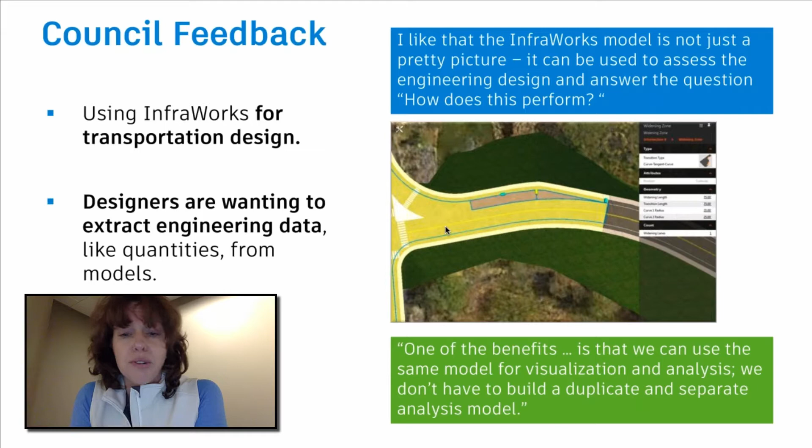This is something they've seen increasing in frequency over the last year. They want to use InfraWorks for visualization, but they also know it needs to be more than just a pretty picture. They want to be able to do engineering design, whether that's analysis or geometric design, and they're starting to use it for that purpose on some projects.

I think the polls confirmed this. I took a quick look at the gallery this morning before the webcast to see what was there, and the breakdown of projects on the gallery aligned with what we saw in the polls. Quite a few people are using InfraWorks for transportation projects like bridge replacement proposals or visualizing an interchange, which you see in the lower right corner. There's also quite a few site design projects in here, like new office buildings and new universities and schools.

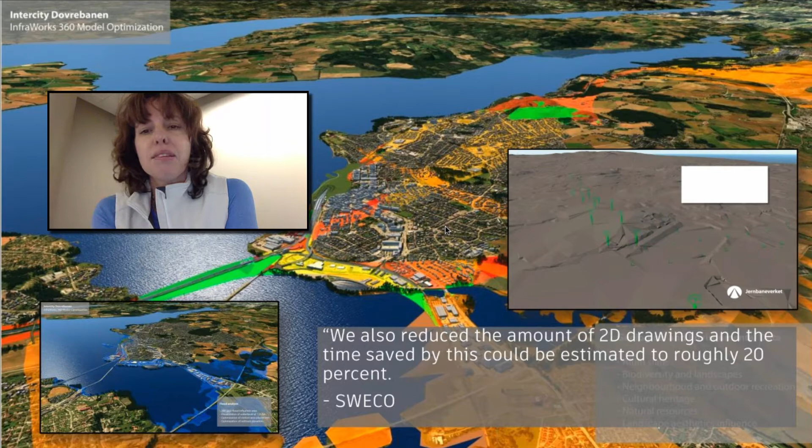I wanted to point out this project in particular. This is a corridor planning project in Norway. You might recognize it if you were lucky enough to be at AU. This was the winner of the Infrastructure Excellence Awards, the 2016 winner. I point this one out not because anyone's done any detailed transportation engineering design yet for it, but this project was really about planning a corridor, transportation planning, and visualization of some data. We've seen a lot of projects like this, particularly coming out of the Nordics, Sweden, Norway, Finland, as well as other parts of the world.

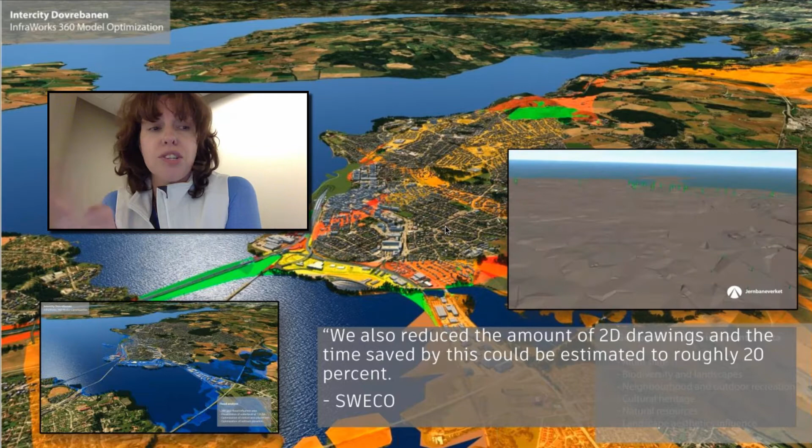We've heard a lot over the last year about how InfraWorks is being used for these large-scale planning projects. Now what we're seeing are those same companies coming back to us, asking how they can use InfraWorks for more of the preliminary design now that the planning phase is done. So one of the things we're looking forward to doing over the next year is seeing how we can exercise some of the design and modeling capabilities in InfraWorks to support the design of these projects well past the planning phase.

I also wanted to show this one because it's pretty impressive looking. It's a good visualization too.

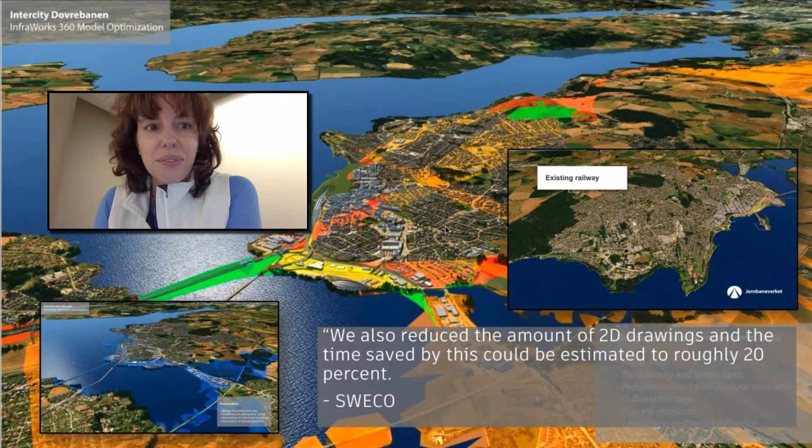So let's get into the new release. It's a little bit about what customers are doing with InfraWorks. We're seeing it used more and more to make engineering design decisions, and you'll see that trend reflected in a lot of the things that have been released this past month. We wanted to support a lot of the workflows related to engineering design.

I always like to show a release timeline so you can see where we were this time last year compared to this year. We had 3 releases in 2017, and the last one was about this time last year. We were talking a lot about road and highway design, mobility simulation, tools for modeling interchanges, and roundabouts.

This year, we're still talking about roadway design for sure, but we're also talking about bridge design, and that might be one of the key highlights of this particular release. In addition to bridge design, we've also done a lot to build more data into the road models you can create in InfraWorks, so you can get more information out of the model, like road material quantities and notifications when the road geometry violates a design rule. We've also done a couple of other things that I'll go through shortly.

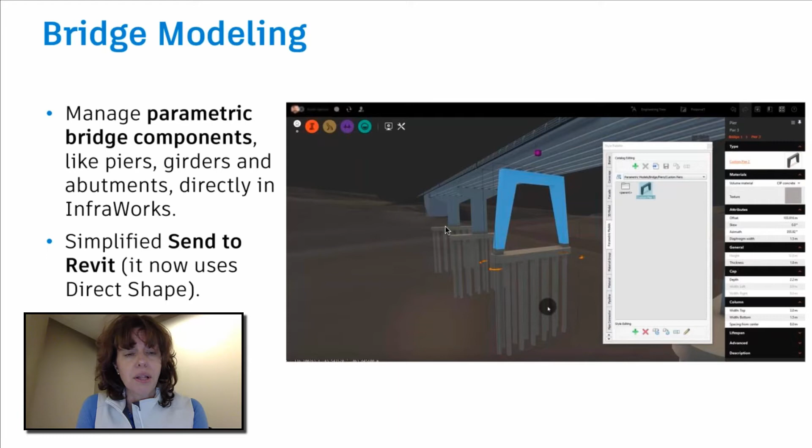So I'm going to start with bridge modeling. For those familiar with Project Kameleon on Labs, that project eventually made its way into a couple of things, one being this feature. What it turned into is the ability to model parametric bridge components like a pier, as shown in this example, directly in InfraWorks. I have a video the team put together showing how it works.

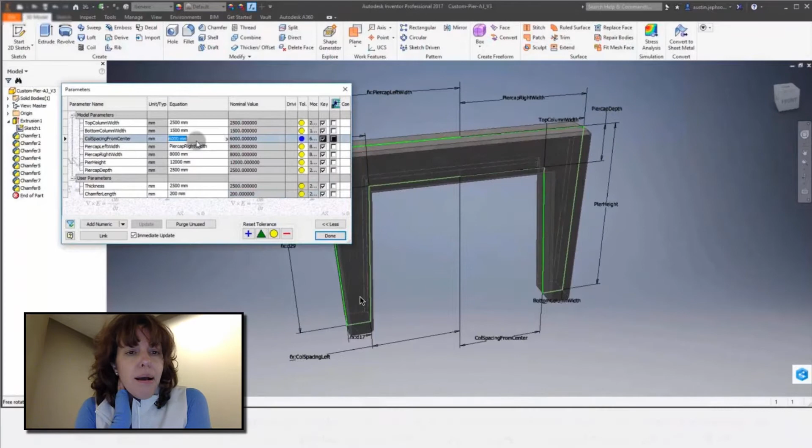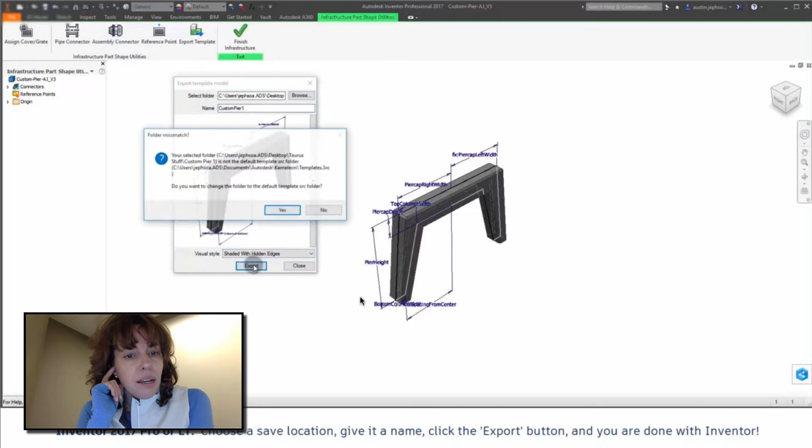The first step is creating a custom part using Inventor. You can use Inventor Professional or Inventor LT for this, and build any part you want with any kind of parametric relationships you want. There's really no special rules or restrictions here—you can build a pier, a girder, or an abutment. In this case we're looking at a pier. When you have it the way you want, you can export that template to a file that will come into InfraWorks so you can use it to model a custom pier. This is definitely different than, say, Part Builder, if you're familiar with using that for drainage components in Civil 3D.

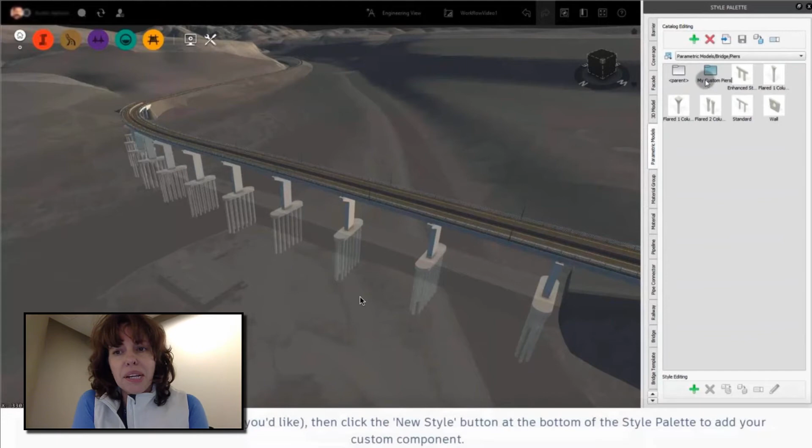This part of the process shows how you get that pier into InfraWorks. So much like any other piece of content, whether it's a style or a 3D model, you can bring it in and import it into InfraWorks through the style palette. You can organize those things however you like. We're creating a new folder and going to bring in that pier. It's a custom pier, that was the name of it.

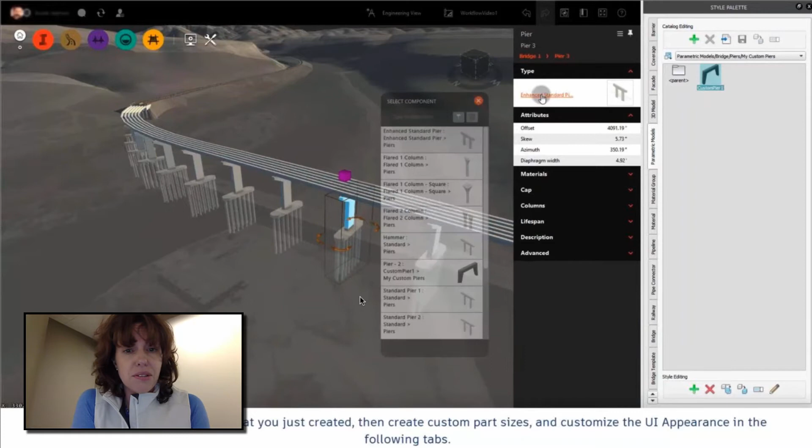You get a 3D preview of that pier in the window, and then you can apply it to the model. In this case, they're going to select one of the piers that's already on that existing bridge, and show you how they replace the selected pier with the one they created in Inventor and brought into InfraWorks.

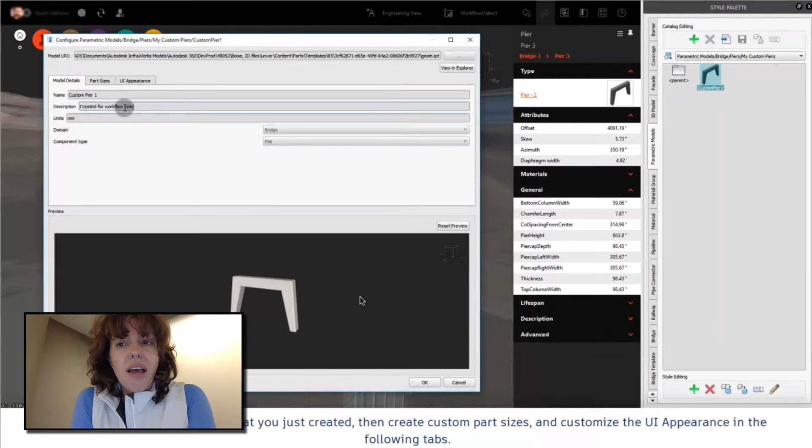The workflow doesn't stop there. So you have your custom pier, and now you can do a couple of other things. You can edit the dimensions of that pier through the stack if you wanted to. You could go ahead and create a copy of that pier, change the dimensions, and save it, so you have different modifications of that initial piece of content available in your InfraWorks model.

In this case, they're going to create a second custom pier that's the same shape as the first one, but they're going to change some of the dimensions, I think, to make it a little bit narrower and to make the legs of the pier a little bit more vertical. And you can save this.

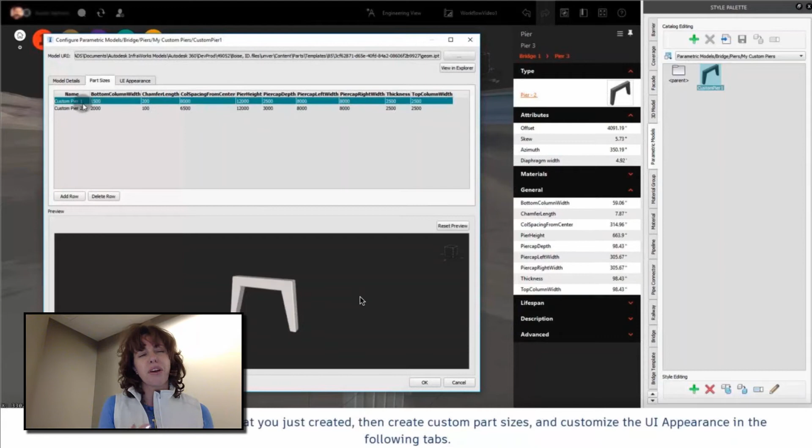It's kind of like the idea of having different parts in Civil 3D, where you can have the same part but just variations on that part by changing a couple of dimensions. The difference here is that they're available in InfraWorks, and that's where they show up on the style palette.

The other thing you can do is change how the parameters are displayed in InfraWorks. So you have a lot of control over this—right now what they're doing is changing the way the parameters are grouped and displayed in the stack. The stack is the vertical panel you see on the right for that selected pier. They're going to change a couple of group names so they can put groups of parameters together, probably to make it easier to navigate or make the changes you want.

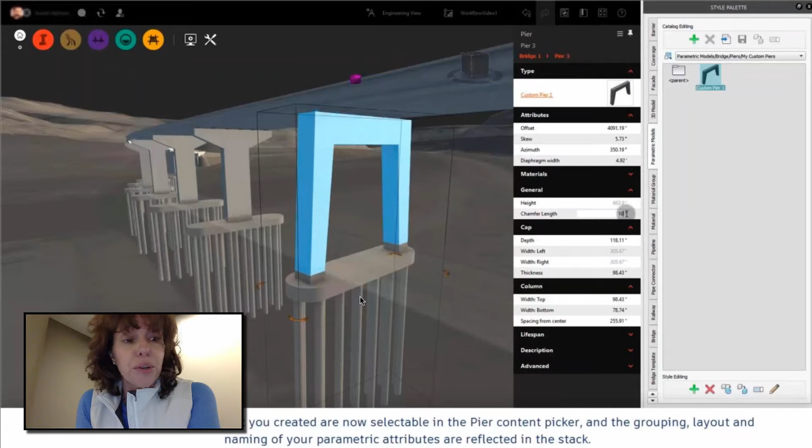You can customize the tooltips. So if you have a parameter, say height, and you want to explain exactly what that height is, you can use a tooltip to do that, and customize it to be whatever you want. This case runs through the grouping and customization pretty quickly, but there's really no restrictions on how you group, label, or describe things through tooltips.

This is showing a workflow that was released in the past release, which is applying to the next selection. So you can apply that one edit you made to all of the other piers.

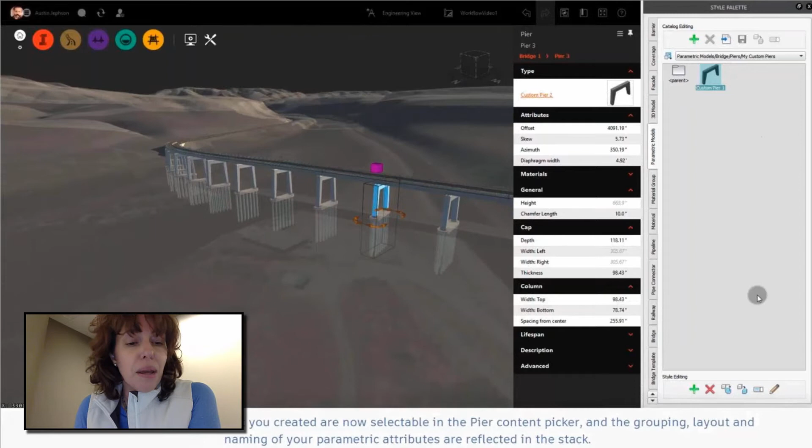And then you can export those things. If you want to use them in another InfraWorks model for another project, you can export them to a separate file, and go through those steps again—import it into a new model, modify it if you want to, and reuse it for the design.

Eric, I'll stop here and see if there are any specific questions about the bridge design capability before I keep going.

I'm scanning the questions now, Sarah.

It says, can I use Revit to create parametric InfraWorks components? That's a really good question. You can send the bridge model to Revit where you can continue the design, add rebar, and do the documentation. No, not at this point for creating the parts, though.

There's actually one question that I can answer. Somebody asked if a video showing this custom bridge component capability is available somewhere, and yes it is. If you visit the YouTube channel for InfraWorks, you'll find that video up there, so you can check that one out, and there are other individual videos about the different features as well.

Yeah, and I know the team that worked on this functionality has created a number of other videos that they'll use as the basis for help at some point. Not sure what the roadmap is for releasing it, but they do know that having videos showing that whole workflow and the potential of what you can create is important, so they're working on that too.

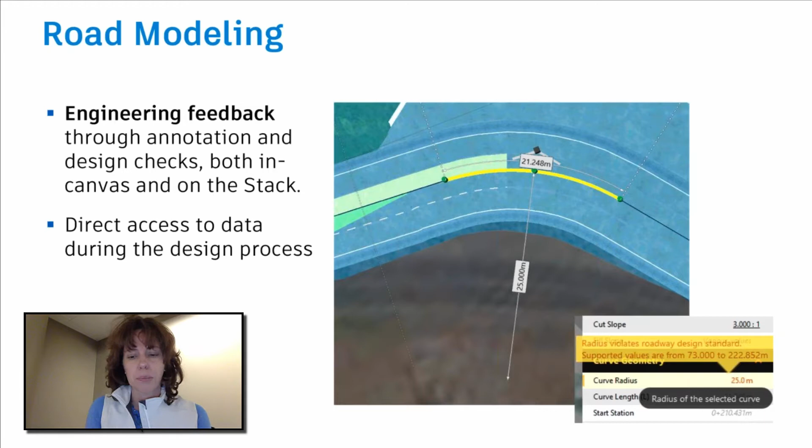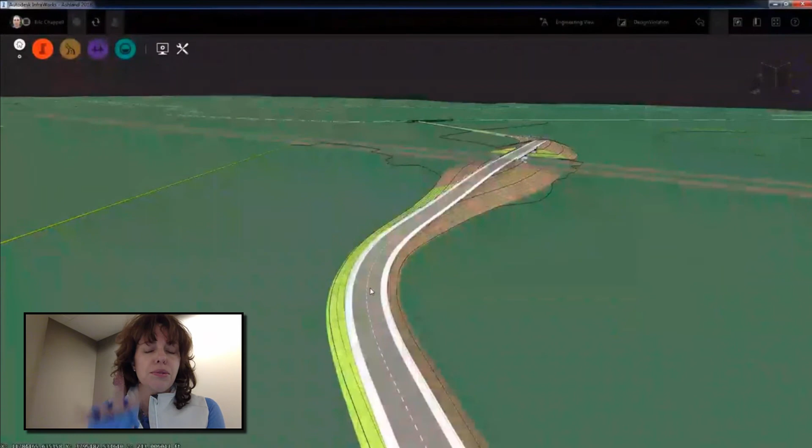This is a quick video that shows what it looks like. I think Eric will recognize this one. This is a roadway in InfraWorks that's selected. One of the things you'll see are station labels on the selected roadway, shown at key geometry points and at 50-meter or 50-foot increments. Those station labels adjust depending on how you're looking at the model, depending on your perspective.

What's happening here is we're editing the radius of the curve in the middle of the screen and making it too small. When we make it too small, it turns yellow - it's a warning. You also see information in the stack that tells you the radius is too small, and it gives you suggestions on how to change that, basically make the radius bigger. When the radius conforms to the standards, it changes from yellow to green to let you know it's okay. We're working on incorporating more feedback like this so you get real-time feedback while you're designing.

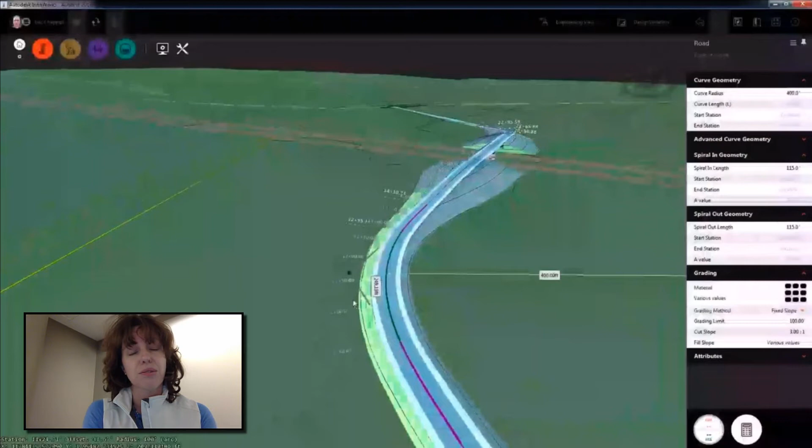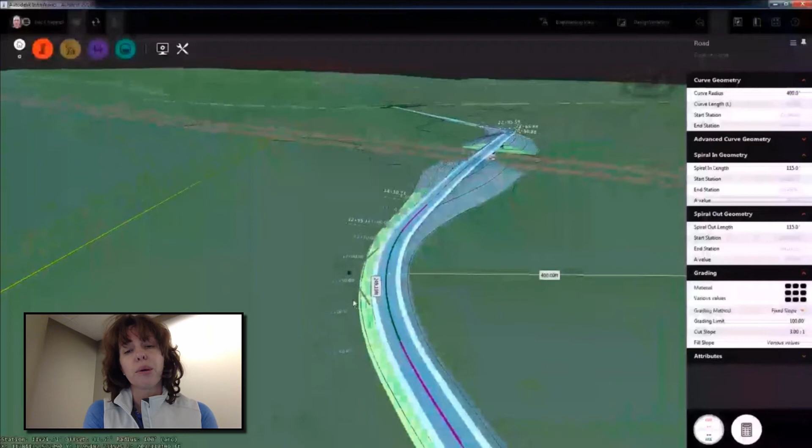This is a relatively simple example, but you can imagine this kind of thing applying to other pieces of the design. Like if we had a more complicated spiral here, it could give you feedback about that. We can incorporate some of these things into bridge design, which we'll talk about a little bit later.

The third thing I'm going to talk about, which is also very important to roadway design, particularly in terms of getting engineering feedback out of the model, are material quantities. Throughout the course of 2016, we focused on extracting earthwork quantities out of the model and reporting those quantities to the user so they can make design decisions.

We've extended that, and now there are more quantities available on that panel. In this case, you're seeing road materials of the components used, like the amount of pavement needed to construct the particular roadway you've laid out. We've also created the ability for InfraWorks to understand the 3D models alongside your roadway design - things like lights, guardrails, things InfraWorks might consider road decoration.

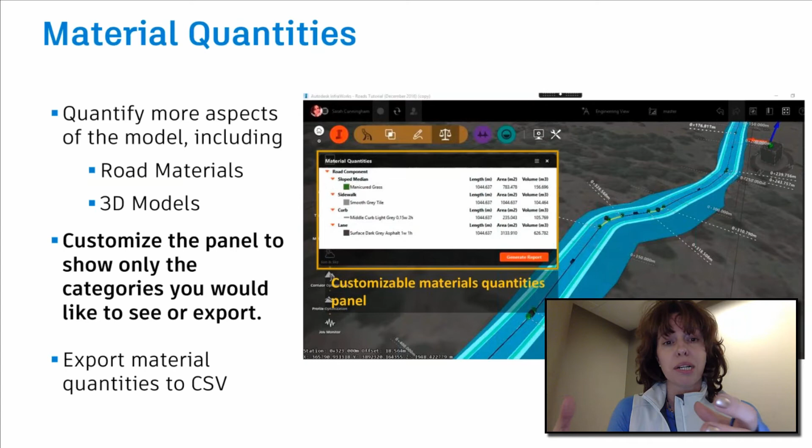Those are now on the quantities panel as well. Now this is great because it gives you the ability to see lots of things about your roadway design. The flip side is that you're going to see lots of things about your roadway design, so potentially this list of quantities could be really long. So the second thing the team worked on was the ability to customize this panel so you can see quantities for only the things you want, so the panel doesn't become incredibly long.

This is the same roadway we were looking at just a minute ago. But now we're going to look at the quantities for that road. That selected road has a bridge, it has some components like a lane and a shoulder, it's got a jersey barrier at some point that it's accounting for. And there are some other 3D models like street lamps - I think it counts 4 street lamps.

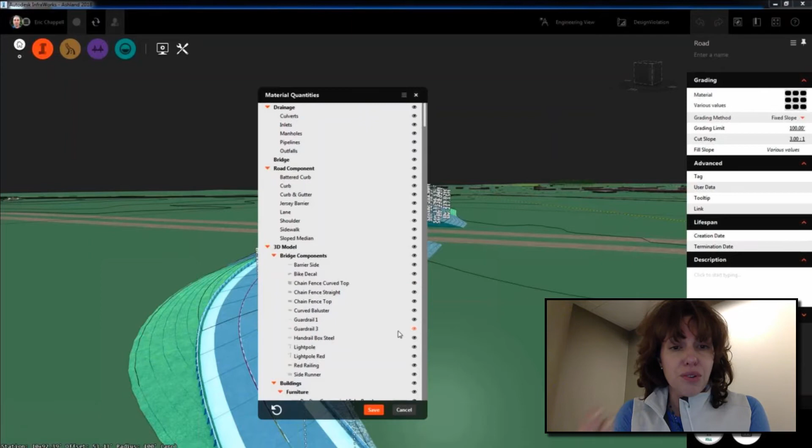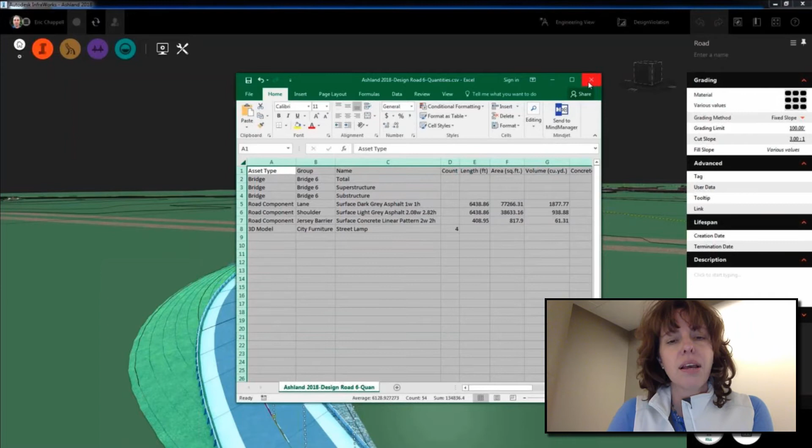That's a really limited list, but if you wanted to see the full range of things you might be able to see, like the drainage components, all the things that go along with the roadway model, like additional components, you can turn on and off the things you want to see, so you can have a quantities report that reflects exactly what you want. Like maybe you just want to see the drainage stuff and nothing else, or just the bridge stuff and nothing else. And you can export that configured, curated quantities display to a report, which in this case is a CSV file shown in Excel.

And the last couple things I'm going to talk about relate to visualization or usability enhancements. The first one is usability enhancements. This one seems small, but it's an important one to address.

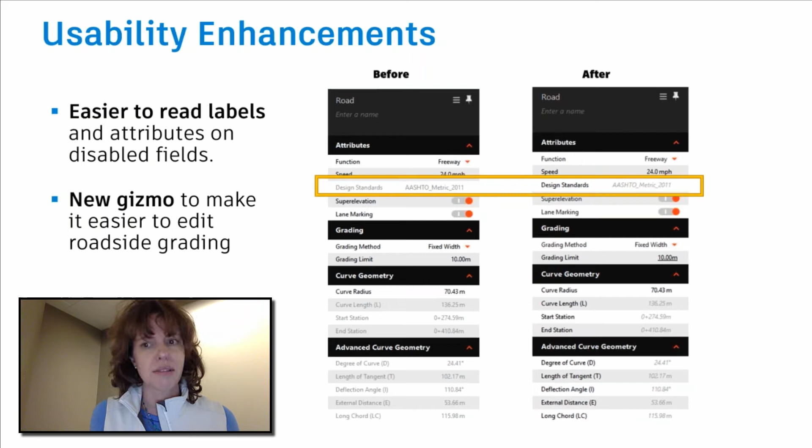We made some of the labels easier to read on disabled fields. I used a screenshot to show this since it's the clearest way. When a field was disabled or not editable, before on the left it would be a light gray color, which is hard to read and hard to pick out. So we made the label a little bolder and changed the details about it. We made them italicized to make them stand out more.

The other usability enhancement relates to roadside grading. We made improvements to roadside grading in the January release, 2017.3, that allowed you to create grading zones, so you could specify specific criteria for a station-to-station limit on one side of the road or another, as shown here.

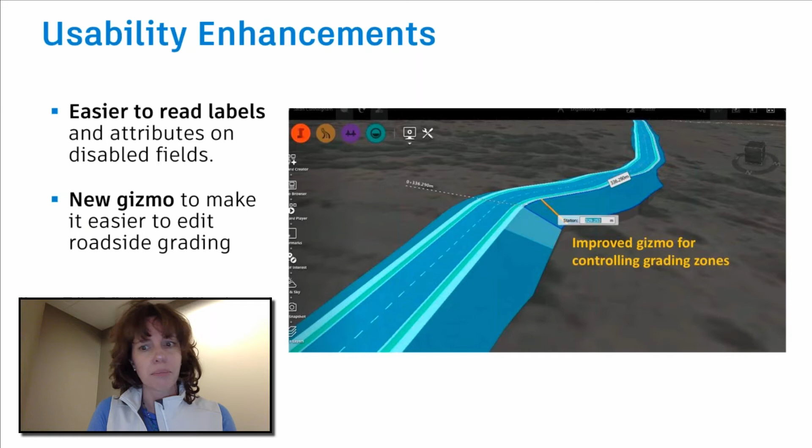We changed the grip to make it a lot easier to control and manipulate, so it's easier to pick the limit of one grading area versus another and change it around. The grip used to be a lot smaller and harder to find before, so we improved that too.

This last thing might be most important to those of you using InfraWorks for visualization. If you go to the view settings, which is a relatively new panel, I think we released that in the January release, but it might have been back in September, I'd have to check.

One of the things we hear from customers who do a lot of visualization, particularly of large areas of trees—a stand of trees, a forest, any model with a lot of trees—is that up until now you can run into problems where it performs poorly while panning and zooming, and might not render all the trees quite right. The reason is that trees, out of all the assets in InfraWorks, are the most complicated to render well. They're just complex looking in general.

So if you have a model with a lot of trees and configure a view to use these simplified trees, you might find the performance is a little better. It becomes easier to work with in cases where you're not so concerned about having a realistic view of what the trees look like in the model.

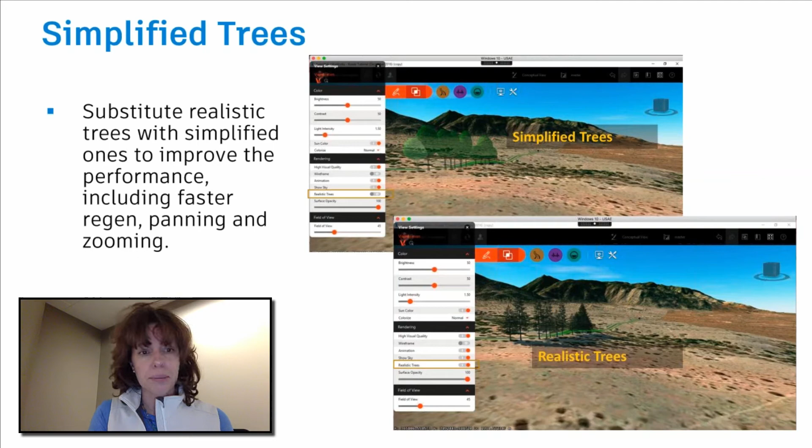So those are the highlights of the release that was just launched a couple of weeks ago. There's only been about two or three months between releases, so we're on this path of releasing more frequently throughout the year. The good news is it makes these presentations a little easier and shorter to follow. But I want to leave you with what we're working on next.

We publish the InfraWorks roadmap on the forums, and I realized the one we published back in January was really hard to read—that image at the bottom somehow gets simplified when I post it, so most people couldn't read a lot of the items. We're going to fix that before we post the next one for sure, but I'm using this opportunity to let this group know what will be on that roadmap when we post it.

I thought giving this audience on the webcast a sneak peek at the roadmap might be a good idea, so that's what I'm going to do. At some point in the next couple of weeks, I'll publish this to the forums for everyone to see. As Eric said at the beginning, when we talk about the roadmap, there's no promise this functionality will be delivered at any point in time. It's just things we're working on next, and we want you to know what those are.

In terms of modeling, whether bridge or road modeling, we're focused on a couple of things. One is in-canvas editing. Before, in one of the videos, I showed the station labels on the road and how it changed color and gave notifications when it was out of whack. We want to create more ways to edit that information in Canvas, as opposed to always editing on the stack. If you think back to the bridge video I showed, a lot of the edits we made to the pier, once brought into the InfraWorks model to view in real-world context, were made on the stack. We want to enable that editing to be in Canvas whenever possible too, because both mechanisms are important to designers and useful in certain cases. So we're working on that.

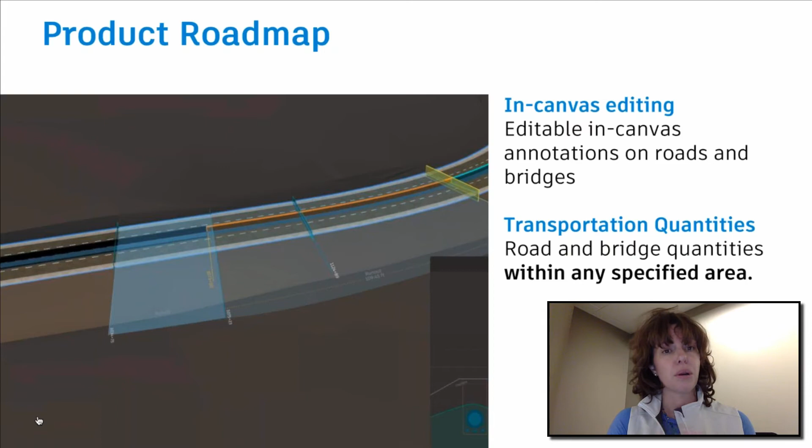The second thing we're working on relates to quantities. I just showed the material quantities added to the quantities panel. One of the things we're working on next is letting you define an area and see only the quantities within that particular area. It doesn't have to be all the quantities for a selected road or group of roads—you can specify any area you want and just see the quantities within that zone.

Continuing with things we're working on related to modeling, we're working on geometric layout that will allow you to design on and off ramps a lot more easily. Sometimes we call this element-based layout.

We're also working on adding more parametric assets to the model. I showed the ability to bring in a pier created with Inventor. We'd like to extend that capability so you can create anything in Inventor—maybe a street light, a guardrail, or some custom barrier—and bring it into InfraWorks with all those dimensions and parametric relationships, doing a workflow similar to the pier. You could bring it in, create variations by changing the size, modify the UI, and modify the tooltips that appear for basically anything, not just bridge components.

The third thing—maybe the most important and significant for last in this roadmap update—is what we're hearing from many customers worldwide: drones and scanning are becoming a much more realistic part of their workflows. Maybe five years ago it was something only the biggest or most specialized firms did, but not an everyday thing. Now scanning is becoming more of an everyday tool, and a lot of our civil infrastructure customers have scanning data they want to incorporate into their civil engineering projects. So we have some really exciting work related to point clouds in InfraWorks as well as Civil 3D.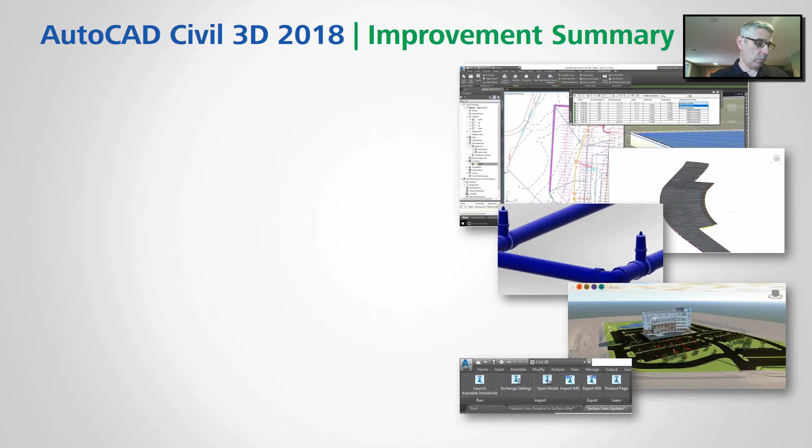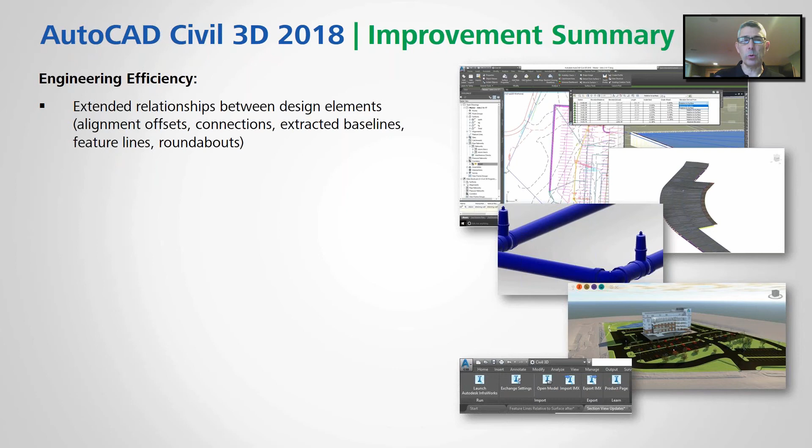I would categorize the improvements in three areas. One of them is related to engineering efficiency. There was actually a question about how we don't have all the relationships in place across Civil 3D, and that's true—there are still some places we want to fill in, but that was the driving theme for this release and the last: to extend relationships between more objects, giving you more capability and power. So it's alignment offsets, alignments connected between two different alignments, how we can use an extracted baseline and a corridor—really tying those all together more tightly, and giving you additional control as you're modeling. We'll talk about some of those improvements.

And then focusing on improving the modeling of drainage and pressure pipes—some of these are improvements we made during the 2017 release that we've now been able to roll up into the 2018 release. We also know that you guys have to deliver production drafting, so we've made improvements on things that have actually been in the product for a long time, but you can now create plan-over-plan and profile-over-profile sheets.

There are also significant improvements on your ability to react to changes when generating section sheets, so we'll look at that. And then finally, this was a theme throughout many of the questions on the webcast: it's really about interoperability between products. How do we improve the workflow between Civil 3D and InfraWorks, between Civil 3D and 3ds Max and BIM 360, and work being done between Civil 3D and Revit, InfraWorks and Revit, and so on. It's certainly a theme throughout Autodesk. We know we have to do a better job of making these products work in a more interactive and collaborative way.

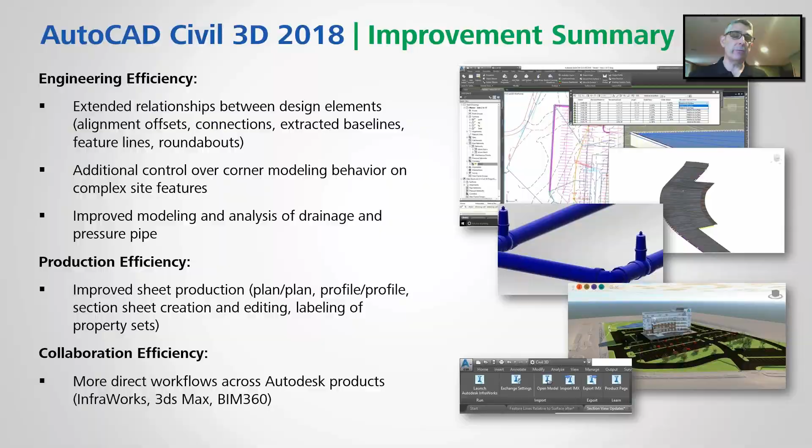Okay, I'm going to go through these quickly, but at a high level, here are the key things you're going to want to look for. First is this whole idea of having a feature line that's relative to a surface.

Think of it this way: if you go to an Autodesk University class, you'll first see somebody create a reference surface, then project feature lines up to that surface, and progressively refine those feature lines to build their final top surface. What we've done is made it so those feature line elevations can remain persistent to that surface. So if that surface changes, if you want to make a macro-level change, you can do so, and all those feature lines will react.

However, we also know there may be a lock to an elevation, or feature lines that we want above or below that surface as you get into that refinement process. So that's a major change here, targeting all users - land development, site, and transportation folks are all going to benefit from that capability.

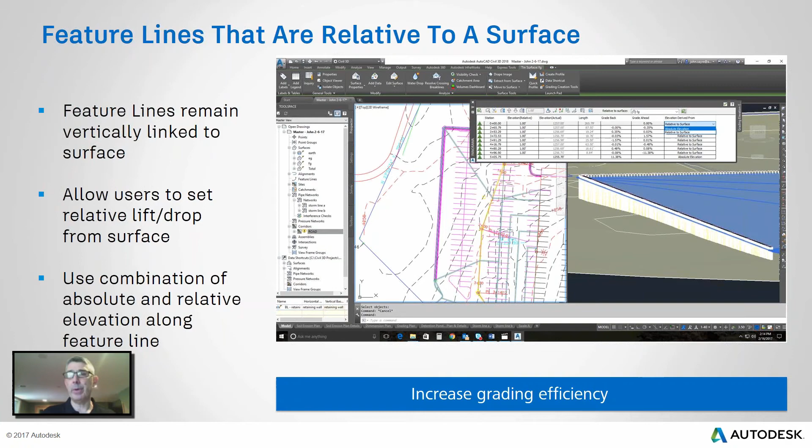Another one along the line of extending those relationships: we've always had the ability to create offset alignments from a center line or from another alignment. What we've now added is not only do you have that offset horizontally, but you can now apply a vertical to it. So when you offset that alignment, you can say, I want to follow the design profile from that center line, and offset at say a 2% slope, and then change that slope at certain station values.

So if I want to design, say I'm working on a subdivision road, and want to design my edge of pavements relative to my centerline versus using a corridor, I can do that very efficiently, with a number of controls we've added. We've also done some simplification - simple things such as when you create the offset, automatically superimposing that onto my centerline profile. Really just trying to cut down the number of steps and picks and clicks for a pretty typical operation.

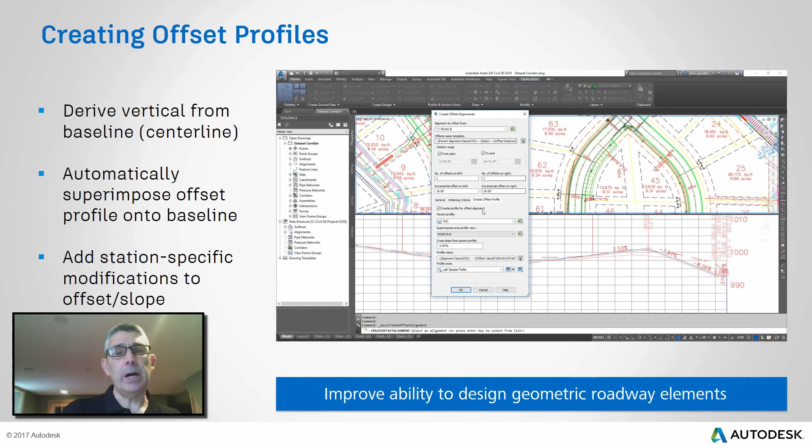So again, that's an example of connecting those different objects in a way that we haven't had in the past. Another one would be connecting two different horizontal alignments, both horizontally and vertically. Like in the image on the right, I've got my edge of pavement for my main road and that cul-de-sac road. What we can now do is add a simple connection spanning the two, in this case putting in the curb return. I have control over the radius, and control over how that vertical is going to be controlled, locking vertically to both alignments that it's connecting. So if one thing changes, the profile updates for that connection.

You can also overwrite vertically what's happening within that connection - say you want to change things for flow, for drainage, and so on. We've had the ability to do something similar when modeling an intersection. This gives you a bit more of an ad hoc approach, so really any types of alignments you want to join with a persistent connection, you can now do very, very easily.

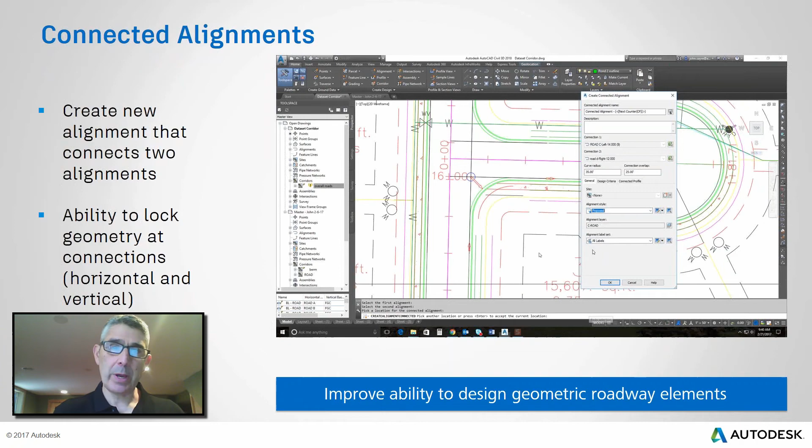Okay, and then the last one I'll talk about here is really being able to progressively build out a corridor using more and more of the individual strings.

Over the past year we added the ability to give you better control over extracting features from a corridor. So I want to specifically extract a string that's named this from station here to station there. We now have the ability for you to use that extracted feature line and define that to now be used as a baseline in that same corridor. It's this idea of progressively adding more and more controls into a corridor.

Rather than working with conditional assemblies and making a gazillion different regions in a corridor, you can make it into a very simple corridor, then extract a key string, add it as a baseline, and build off of that. This gives you control, maybe a different frequency control within one part of the corridor, or maybe driveway curb cuts, and you don't want to manage all of those as different regions. So a lot more control, and it's that whole theme of giving you more things that remain connected so you can progressively refine and build out more of your different types of models - transportation, site, land development, all of those different project types.

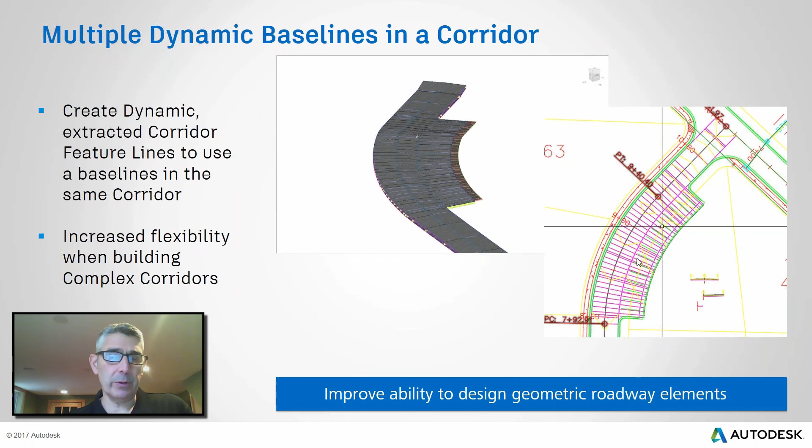Looking at production efficiency, what we've seen over the years is people initially create their section view groups, laying out all of their sections onto sheets just the way they want. There's generally a lot of hand drafting that has to occur - a call out, a bubble, maybe some text, maybe some block that you can insert into that specific section.

Then what happens is, okay, maybe we need to make a change - maybe we insert a section somewhere near the beginning of that sample line, near the beginning of that roadway. What people were challenged with is how do you update all of those sections and have all of that ad hoc drafting move with it? That's the introduction of this.

We call it a section view drafting buffer. Basically it's a non-plotting area - well, you can plot it if you want - around the section view, and anything within that, any CAD entity, hatching, blocks, text, whatever it may be, those are graphically glued into that section. So they're still their own thing, but if I insert that sample line and then update my section view group, all of that drafting is going to move with that section to its new location.

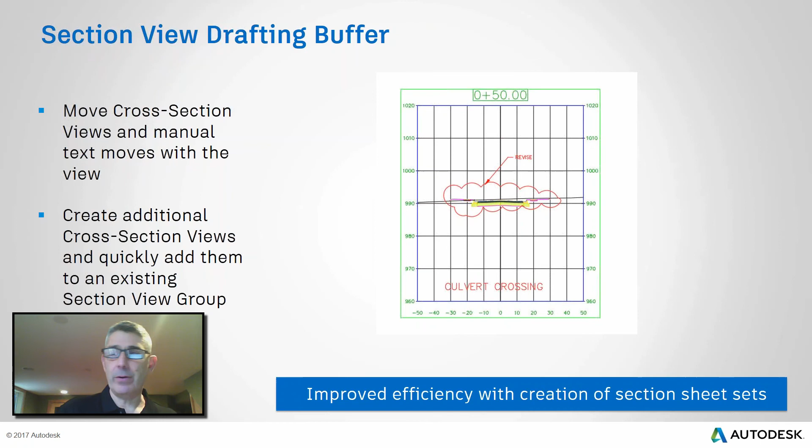So it gives you that ability to get the drafting the way you want it, and then if you have to make a change, you can very easily, really with the pick of a button, just have everything update. Real quick, real easy.

The other one we added was on the plan over plan and profile over profile sheet creation. This is probably the smallest UI change we've ever made in any feature, but it gives you a significant improvement in workflow. You'll go into the same process you've done when making a plan over profile sheet, and you'll see there's a couple of different options, and we've added a couple of different sheet templates in there.

Just as you may have made your own custom sheet layouts for plan over profile, you're going to do the exact same thing if you want to make your own for plan over plan or profile over profile. So effectively it's the exact same process you've used in the past, but you now have the ability to have multiple plans and multiple profiles on that production deliverable.

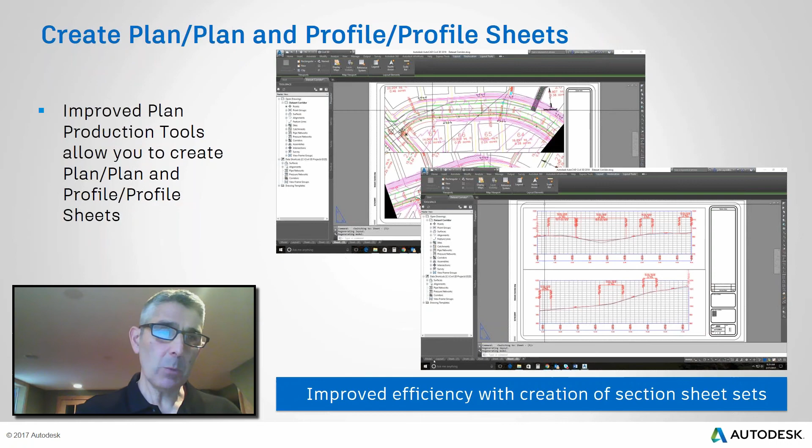The last area I wanted to touch upon is collaboration updates - again a big theme of the Q&A we've seen here. Within Civil 3D, this is kind of a work in progress, but we've added a new ribbon tab that's focused on giving you a more streamlined ability to have that dual product workflow. In this new UI, you can launch InfraWorks, and all of the tools related to moving data back and forth between the two products are located in one spot. What you will see over the year and beyond is this will fill out into more seamless workflows.

It will expand upon those point-to-point exchange workflows, with more intelligence and more support for objects. But we also want to make it so that while I'm in Civil 3D, I may want to perform a task that's better done within InfraWorks. We'll be able to effectively launch that operation from here, launch InfraWorks hopefully with the correct data in place so you can do what you want to do, and then move things back and forth. That's really our vision for this workflow and the UI we've introduced.

Along the way, though, we've continued to make other improvements. For those of you who use 3ds Max, we've improved our export to 3ds Max utility. Previously we had a separate extension called Civil View for Civil 3D; that's no longer needed, as all of that functionality is natively included in the product. We also made improvements to that workflow, including performance of the utility, better control over what you're selecting, folder support, and a number of other things.

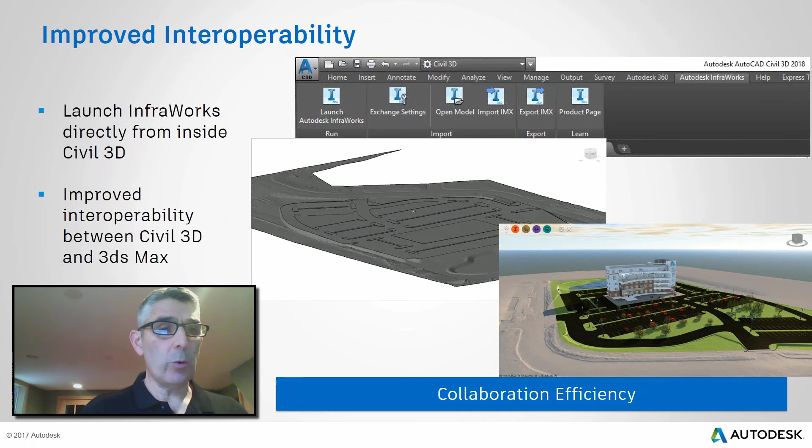There are other things underway, some actually available now. One not listed here is on the Revit side: they now have a similar ability to what we have, basically the ability to underlay an NWC file, kind of like the collaboration approach we have on the AutoCAD-based product. So I can now have my Civil 3D drawing, save it as NWC, and then underlay that into Revit—part of this whole coordination model approach. A lot of work we're doing here that you'll see progressively over the year.

The last area is a number of improvements delivered over the past year. Specifically, things that were in the 2017 V1 improvements release: creation of property sets or inclusion of property set values in our object labels, the Analyze Gravity Network tool, the Swap Pressure Network Parts tool, and also the Traverse Editor and Traverse Adjustment tools added midway. Those are fully integrated now into the product and the UI. Exciting stuff there. Other historical extensions are underway and will begin to roll out in the near future.

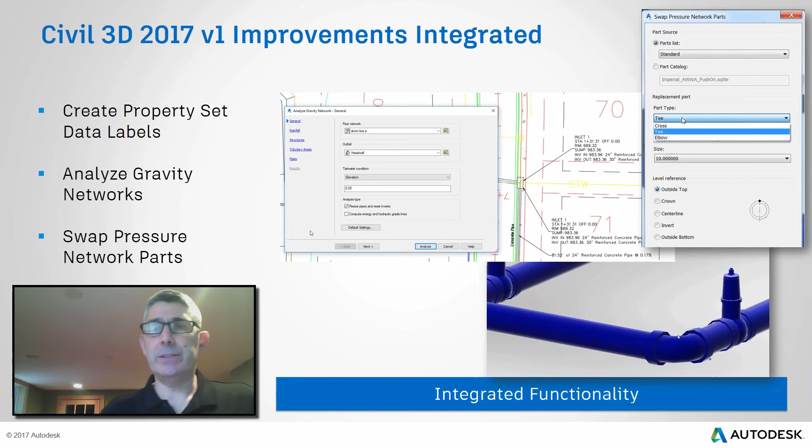Key point I want to make too, before I pass it back to Eric, is we look at this as an ongoing process. Civil 3D 2018 is shipping, yes, but we see this as an evolving platform, and we've got a very aggressive plan over the coming year to really execute on this continuous delivery strategy—giving you ongoing improvements done in a way that's very low on disruption, very high on value.

A couple of things to give you a feel for what we're thinking about. On the engineering side, again, the themes of engineering, production, and collaboration. A lot of research is going into specifics related to road rehab and resurfacing, how we optimize that and make it more efficient. There's also lots of discussion on the Q&A related to what happens with the former Kameleon Labs project—that's delivery of a tool and workflow for creation of gravity and pressure content, both for Civil and InfraWorks, and something we're working quickly to get into production mode. There are a number of improvements tying things together, and giving you improvements in geometry, layout, and modeling.

On the production side, we're looking at things related to how you create, or really focus on, that process of projecting and adding blocks, points, feature lines, and all those other types of things you want to add into both sections and profiles. We're trying to make that a bit more consistent and simplify that workflow a little bit.

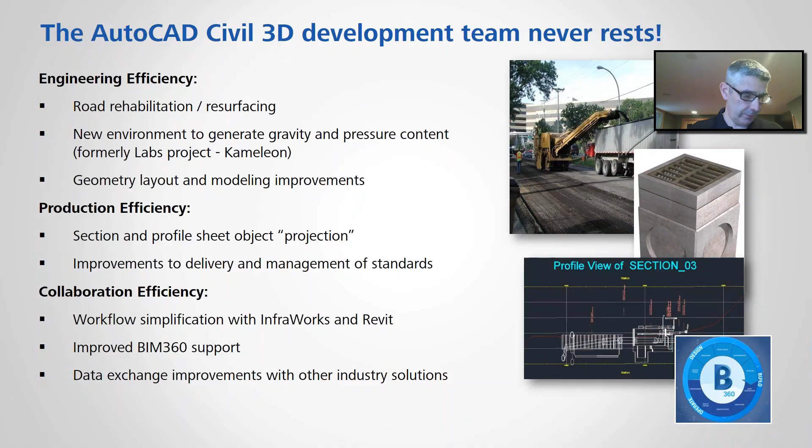Okay, so those are the things that I wanted to cover. Eric, I think that leaves you just a couple of minutes, but I'll stay online and look at any questions.